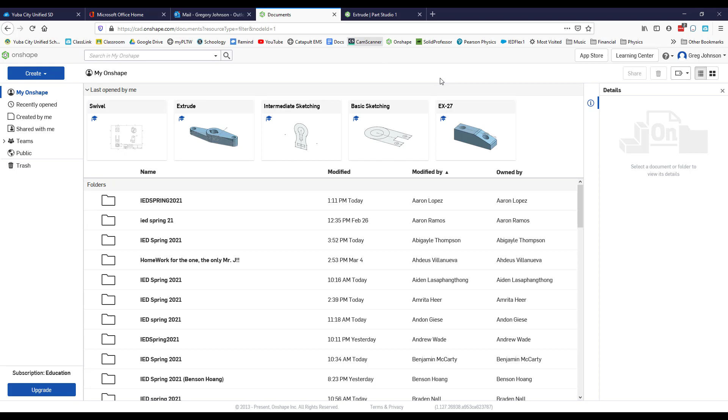Hi everyone. We're going to work on making the part for the lesson called Extrude, or the exercise called Extrude in the latest... oh my gosh, what is the name of the darn thing? Well, we'll get to it in a second. We'll find out shortly because what we're going to do is go to the Learning Center.

We're going to go into self-paced courses, into Onshape fundamentals, and the one we want is part design using Part Studios. No wonder I couldn't remember it - that's kind of long and vague.

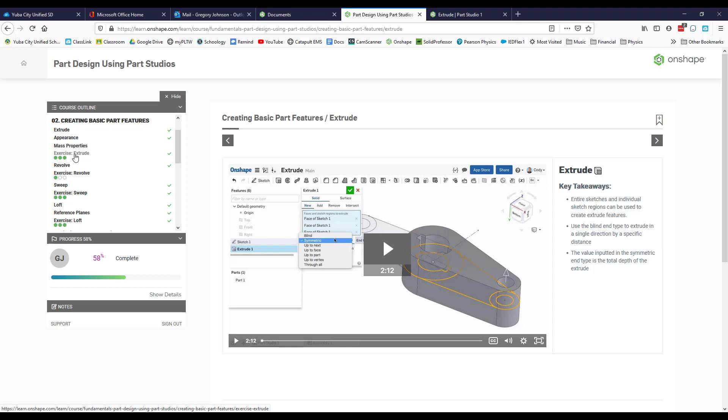So of course what I'm expecting you to do is watch these first three videos, and then we're going to do the exercise Extrude. Here it is - when it's all said and done, we'll have made this part.

And here are the step-by-step instructions. We're supposed to make a new document and set it to millimeters. I've already done that, and there it is right there. So I'm going to move on to the next part.

First thing we're supposed to do is sketch this rough drawing. Remember, you don't have to put in dimensions right away - you can just make the shape in general and let the dimensions come later.

One thing that occurs to me is it looks like the centers of all the circles lay on the same horizontal line, so I'm going to make sure I put horizontal constraints between those. Everything else seems pretty straightforward.

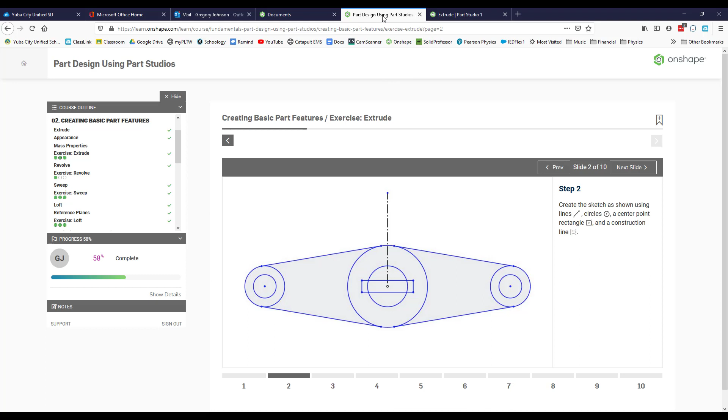So let's go back to our Part Studio, and we are going to start a sketch on the top plane. I'll bring my top plane back so I can see it, make a new sketch, then hide it again. I'll click N for a normal view, and let's start making this thing.

The first thing is there was a vertical construction line extending upward from the origin. So I'll click L for line, Q for construction, hover over my center point, and draw a line up.

Now there's a lot of circles here, so let's get the center circle tool by clicking C, hover over that origin, and make a couple circles that are concentric with one another. Remember, concentric means sharing the same center.

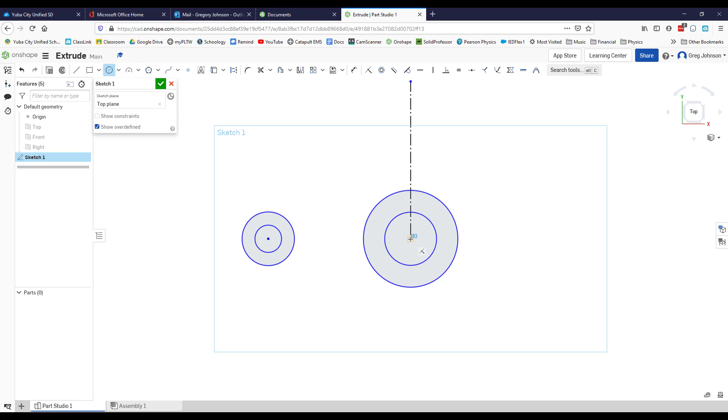Also I'm going to make the pair of circles on either side. I want them to line up horizontally with the origin, so I start by hovering over the origin - it gives me a plane of reference. Come out here, make a couple circles, and do the same on the other side. Oops, I didn't mean to click there - let's try that again. I just meant to hover and then go out and make a couple circles.

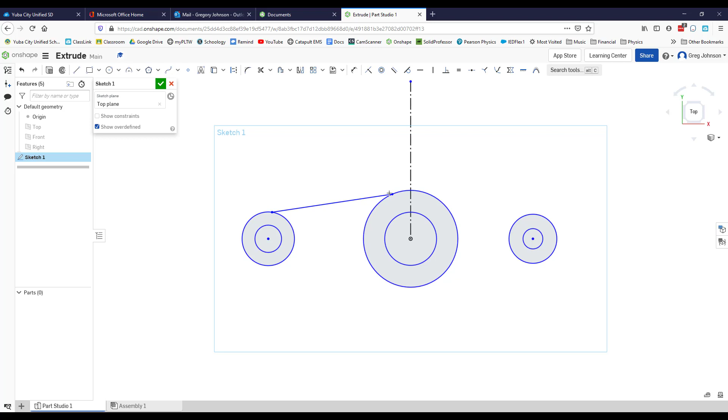Now there's some lines that connect these, so I click L for the line tool. Start near the top, but not exactly at the top, and I have to hit Escape after each line and L again to start the next one. If you're connecting a bunch of lines together, you don't have to restart the line command every time, but these lines aren't connected, so I do. And one more.

You notice it's roughly what we were supposed to make, but not exactly - that's okay. Oh, there's one last thing - sorry - there's a center point rectangle that goes in the middle. Center point rectangles are great if you want to define the center. So I'll make that about there.

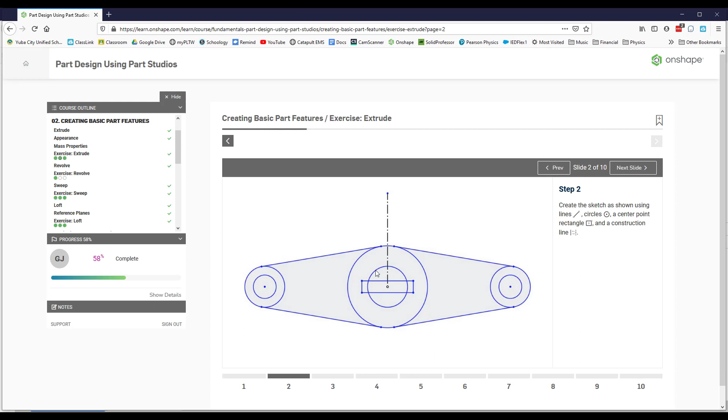Okay, so now you can see, if I bring that tab back down, that we've made approximately what they're asking for. So let's go to the next slide and see what they want.

These lines should be tangent to all three circles. So let's follow the instructions carefully. It says use the equal constraint to make both circles in pair A equal, as well as both circles in pair B equal. And then let's be sure to include the tangent relationships where the lines meet the circles. So the first thing they want us to do is put equal constraints between the pairs of circles.

So I'm going to make this one and this one equal. Why didn't that work? Because I guess I didn't hit the E. There we go. When you switch back and forth between windows, often you fail to remember that you have to click on that window to get it back.

Okay, so now both of the circles are equal, and then we have to do tangent constraints. I'm going to hit the T key for tangent, and go between the line and this circle, and the same line and that circle. I'm going to go between this line and the little circle, and this line and the big circle, and keep doing that until I get all the lines tangent to all the circles. One more, and there we go. Remember that tangent just causes that nice smooth transition. You get a cool looking shape there.

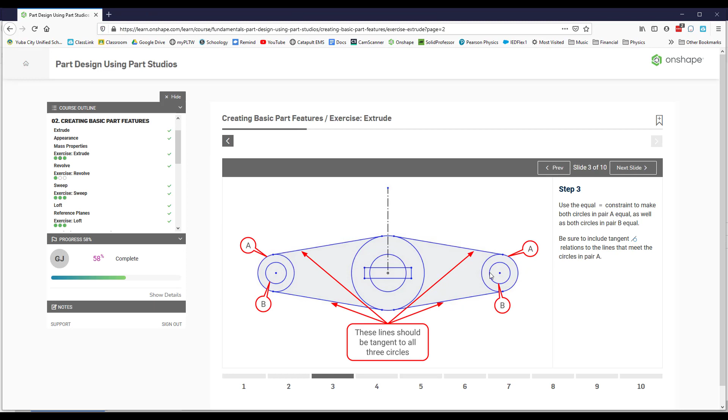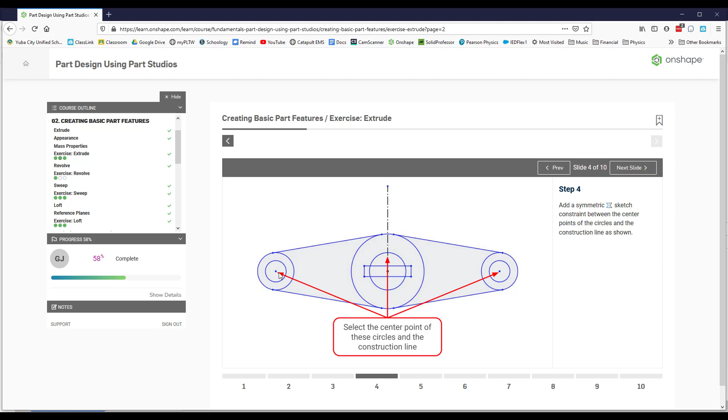All right, let's look at our instructions again and see what we're up to. We are supposed to select the center point of these circles and the construction line to make a symmetric sketch constraint. In other words, whatever happens over here is going to happen over here - that's actually going to keep our parts centered. And that's a good thing. That's what we want. So let's go ahead and do that.

The symmetric constraint is this one right here. I'm going to click on that. I don't really know how to use this one as well, so I'm going to actually highlight those two dots first, and then click symmetric, and then click this. Yeah, there we go. So I highlighted the points that I wanted to be symmetric, and then once I clicked the tool, I found the line of symmetry. Now this thing will always be centered, and the distance between this dot and the center line and this dot and the center line will always be equal.

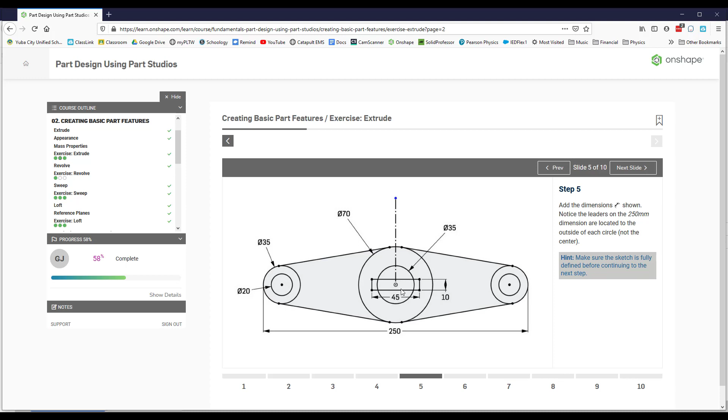So I'm going to move this to my second monitor so I can keep it in my view. Let's start with dimensioning all the circles. I'm going to click D for dimensions. Nope, I have to click actually on this window first. Then I'm going to click D for dimensions.

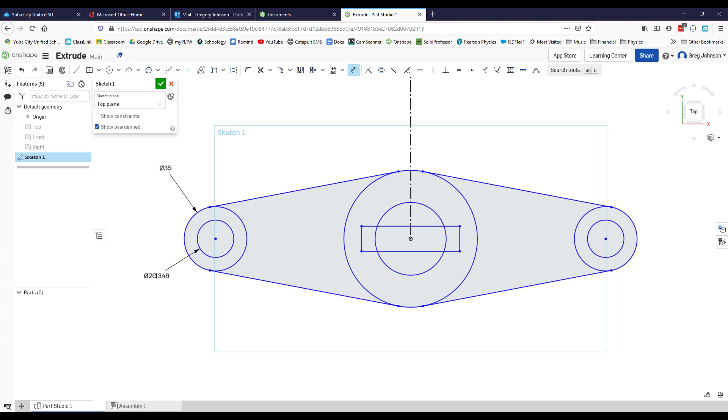And this one is supposed to be 35. This one is supposed to be 20, which automatically takes care of that one. The big circle here is supposed to be 70, and the smaller circle will be 35. Now as far as the dimensions of the rectangle are concerned, the width of the rectangle is supposed to be 45, and the height of the rectangle is supposed to be 10.

And there we go. Okay, so if you notice, it's still not fully constrained, but that's because we could still, if we wanted to, move these in and out. We haven't defined the width of this thing yet. Okay, so how are we going to fix that?

Well, with that overall dimension they were talking about. Now, it said it wants a dimension to the outside of the circles. I'm not sure how that would work. So what I'm going to do is put some points in here. I'm going to hover over the center, go out until I reach the circle, and that will give me a point at the outermost part of that circle. I'm going to do the same thing on this side, come over here, and click. Now I've got two points to dimension to, and I think that's going to work better.

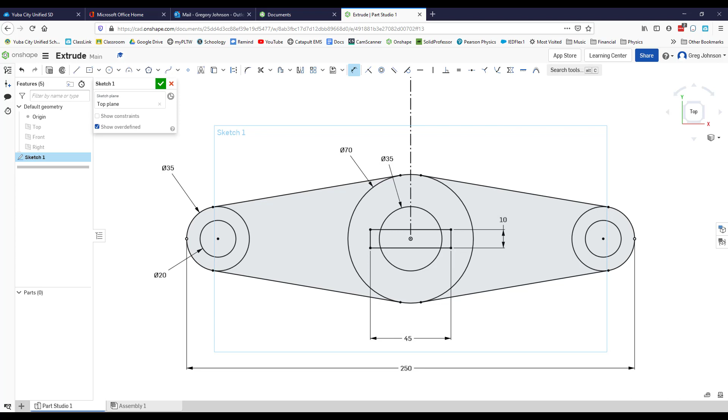So I click D to get back to my dimension tool. I'm going to click this point and this point, come down, and make that 250. Now we are fully dimensioned. All right, what is next?

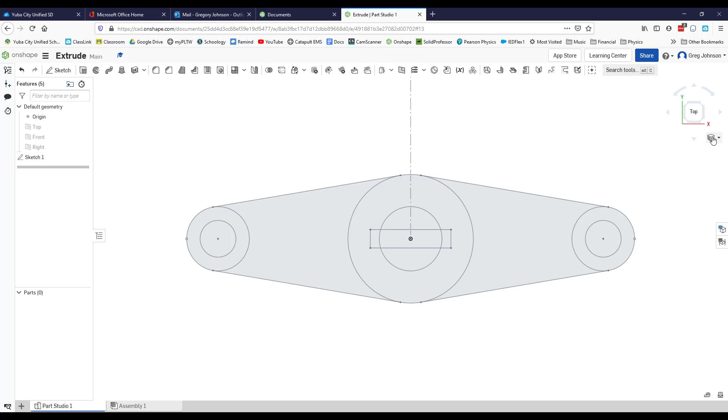What is next is some extrusions. Okay, so it looks like we're going to extrude part of it, but not all of it. That's fine. So let's extrude the right half. And of course, we're going to have to finish our sketch in order to do that. And when I do extrudes, I like to have the isometric view. That way I can see what direction the extrude is going and what I got.

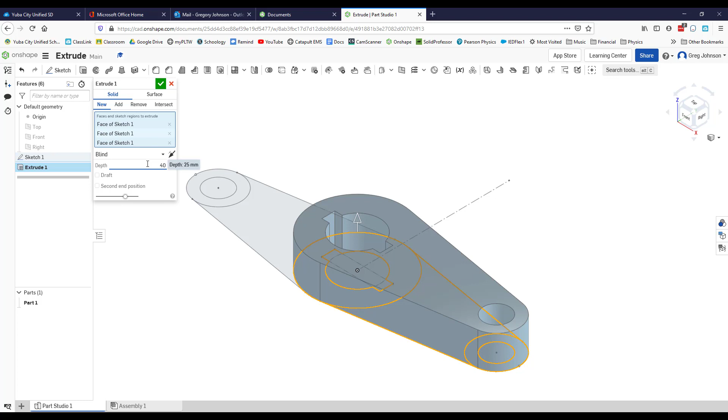Okay, so I'm going to click the extrude tool. I need this, and this to get what was matching. Well, there it is. Now the depth I was supposed to do was 40 millimeters according to the instructions, and there it is. So I'm going to click the green checkbox, and that's what I got.

Now if you notice, once I finish the extrusion, our sketch is gone. Well, that's no big deal. We can bring it back by clicking on the eye symbol.

Okay, now let's look at the instructions again. And they would like us to extrude the rest of it, a blind extrude at 25, and add. So let's do that.

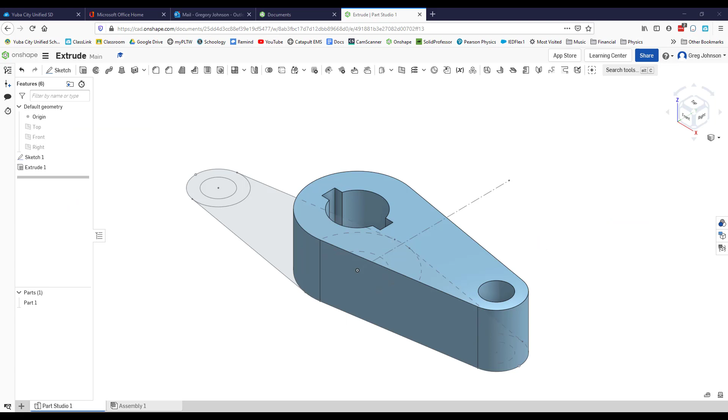So I'm going to shift this around a little bit so I can see what I'm looking at. And I'm going to click the extrude tool. I want this part and this part. They were supposed to be 25, which is the default, so, and it's already on add, so I just click it and voila. I'm going to hide that sketch now because I don't want to see it when I'm looking at my part. And there's my isometric view.

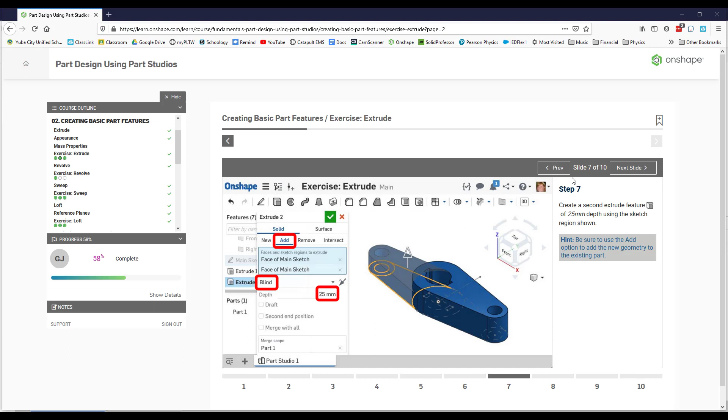Now what else do they want us to do? I noticed we weren't at the very end there. They want us to rename the part bracket. Okay, and by the way, this isn't a bad thing to do when you're doing your own designs, to give these things names that are meaningful. Part 1 is not very meaningful. If you actually have a name for it, and then you're making an assembly or something, then you can know what you got. All right, so there's our bracket.

More instructions. We're going to assign the material steel 1020 to this part. Okay, we all remember how to do that. So we're going to right click on the bracket part, assign material. There's a lot of different kinds of steel, so I'm actually going to type in steel 1020. And there we go. This is now steel 1020.

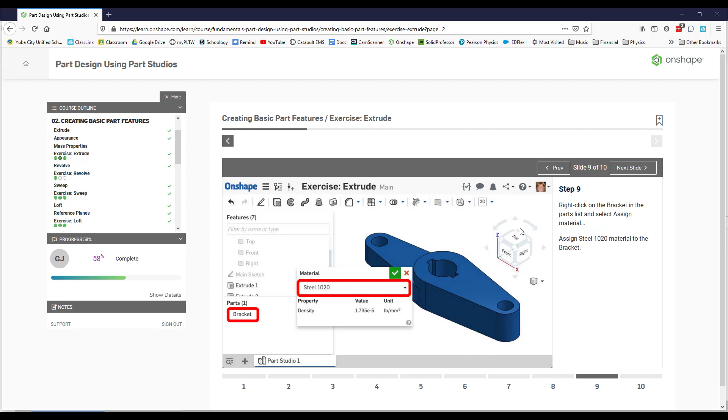Okay, let's see what I'm assuming the last step is, probably checking the mass. It sure is. Okay, so we're going to check the mass and try to remember the number that we come up with. So you click on the scale, click on the part, and the mass is 2902.06.

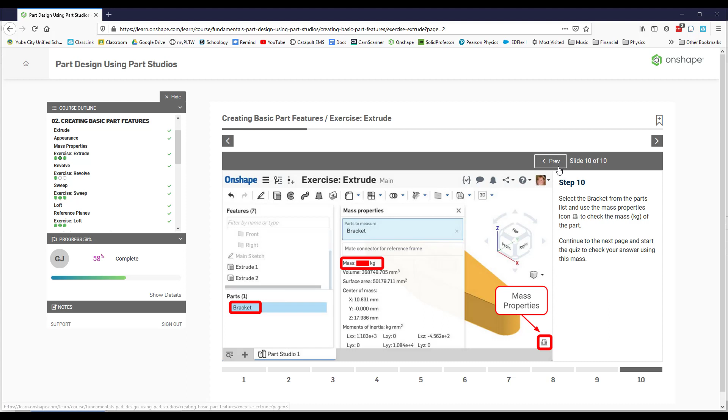Okay, now I assume we're going to do a little check here, and we're at that last slide, so we're going to click the next page. Begin self-check. Now you notice it says 2.902, but that's because it's in kilograms. Okay, that is what 2902 grams is in kilograms.

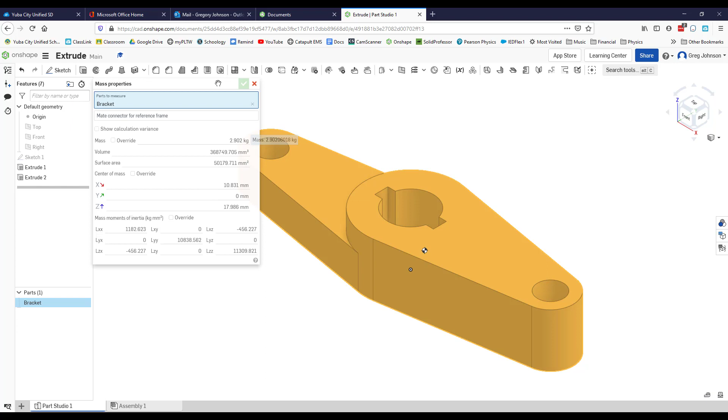Now, if that bothers you and you want to fix that, let's go into the workspace units and change grams to kilograms. Okay, if we do that and we click on our mass properties now, notice it says 2.902 kilograms. All right. Okay, so let's go ahead and select that as our answer, see the results, and bingo, we got it. All right, so that is the extrude.